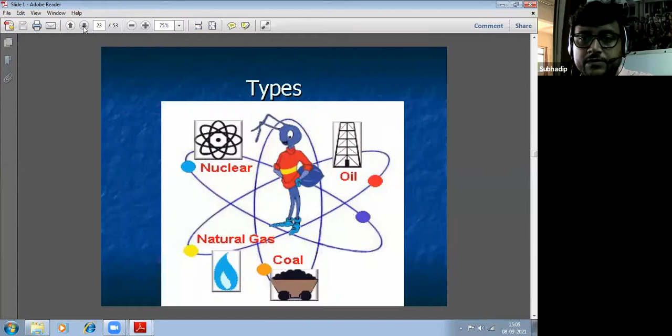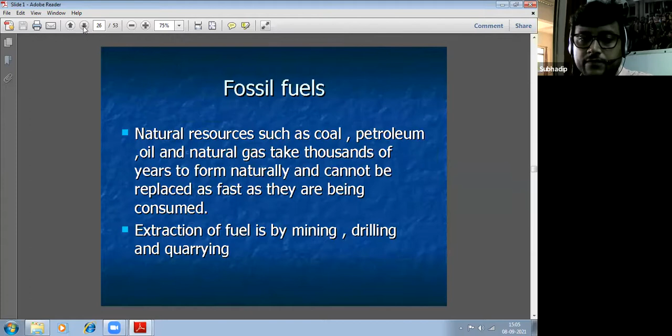So on the last day, regarding renewable and non-conventional energy, we discussed non-renewable sources like nuclear power. We discussed the types: nuclear, oil, natural gas, and coal, and gave a brief introduction to fossil fuels like coal, how it is formed and prepared.

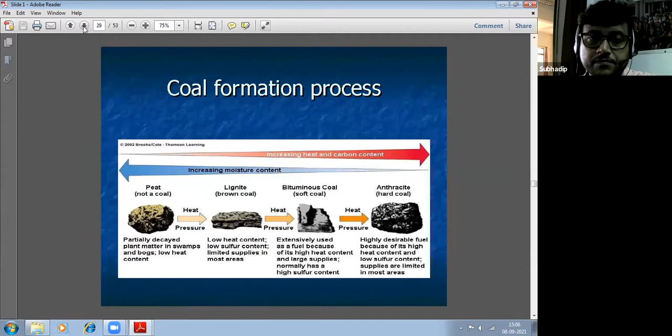Then the coal formation process, and the disadvantages of coal: when coal is burned it produces carbon dioxide that causes global warming. Since coal contains impurities like sulfur and nitrogen, it produces toxic gases during burning which cause acid rain and air pollution. Traces of mercury and radioactive compounds are also released when coal is burned.

It causes severe human health threats like lung disease.

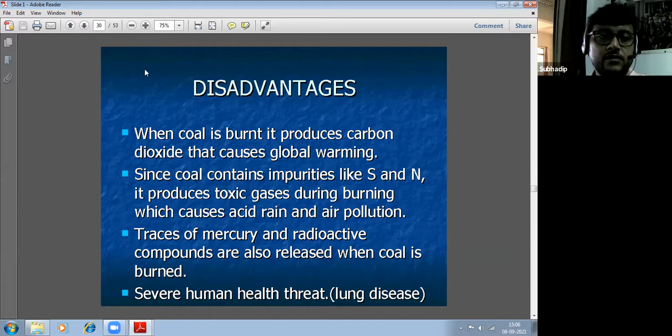Now, oil and natural gas. India has about 0.04% of the world's proven reserve of hydrocarbons. The prognosticated geological resources of hydrocarbon in the country are 21.31 billion tons, of which 61% are offshore and 39% on land.

Crude oil is made of many different components, each with its specific boiling point. Using distillation, we are able to separate these.

Actually, I am having a mouth ulcer, so that's why I'm not able to talk properly.

Crude oil is made of many different compounds, each with its specific boiling point. Using distillation, we are able to separate out these compounds and turn them into commercial products ranging from gases to asphalt.

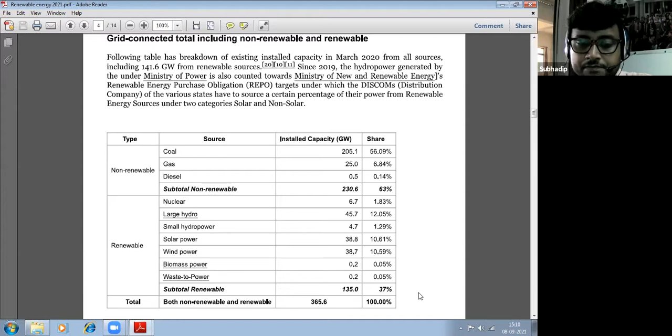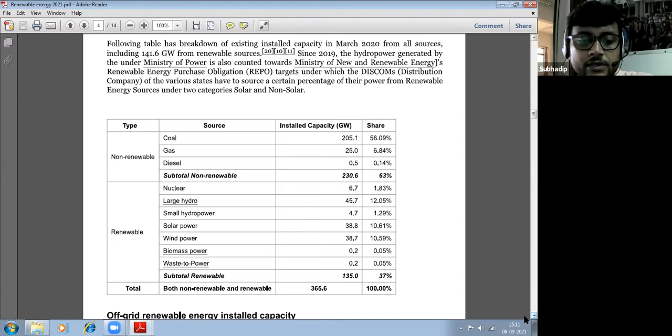So from both non-renewable and renewable, we have totally 365.6 gigawatt installed capacity.

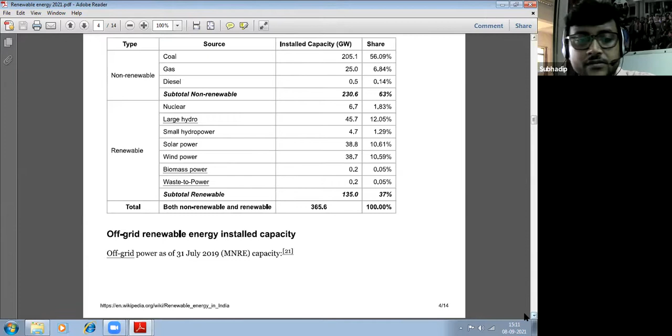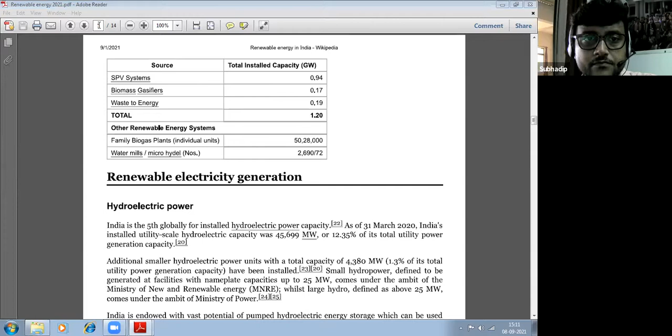Now another thing: off-grid renewable energy installed capacity as of 31st July 2019. This shows the source and total installed capacity. SPV systems have 0.94 gigawatt, biomass gasifier has 0.17 gigawatt, waste to energy is 0.19 gigawatt, and the total is 1.20 gigawatt.

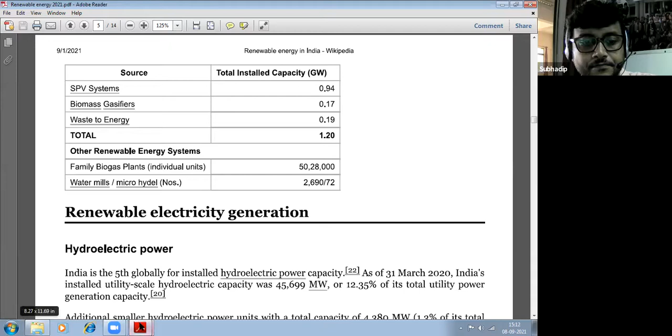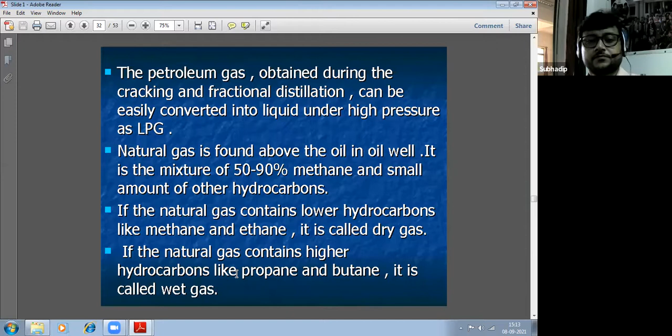Next, petroleum. Petroleum or crude oil is a naturally occurring flammable liquid consisting of a complex mixture of hydrocarbons with small amounts of sulfur, oxygen, nitrogen compounds of various molecular weights and other organic compounds, found in geological formations beneath the Earth's surface.

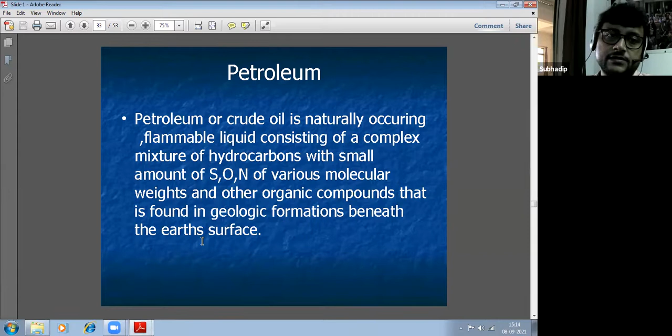Now, how are the oil and gas made? Now you see, this is the ocean. Okay, so 300 to 400 million years ago, these oils were made from these animals. Okay, so these tiny sea plants and animals died. The tiny sea plants and animals died and were buried on the ocean floor.

Over time they were covered by layers of silt and sand, okay, and about 50 to 100 million years ago, okay, the remains were buried deeper and deeper. The enormous heat and pressure turned them into oil and gas. Okay, so from these sea plants and animals, we are getting the oil and gas.

And you see, this is like an ONGC station. Okay, and this is the silt and rock, and this is the deposit of oil and gas. Okay, so today we drill down through layers of sand, silt, and rock to reach the rock formations that contain oil and gas deposits. Okay.

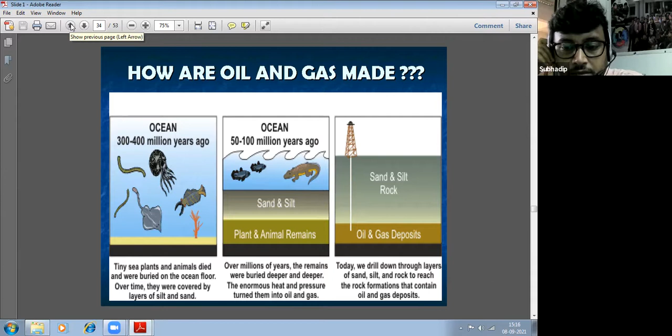Now this is the typical oil refinery process. Okay, typical oil refinery process, and you see the crude oil is heated from the furnace. Okay, the crude oil is here. So whatever the oils, we are drilling down from the particular sand and silt. Okay, through the layers of sand, silt and rock, we are finding the oil and gas deposits.

And see, when we heat the crude oil, okay, when we heat the crude oil, we are getting the diesel oil, then we are getting the heating oil, we are getting the aviation fuel, then we are getting the gasoline, and then we are getting the gases. So there are different segments for the different stages.

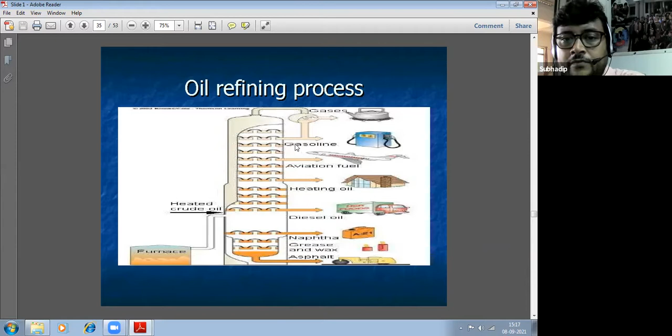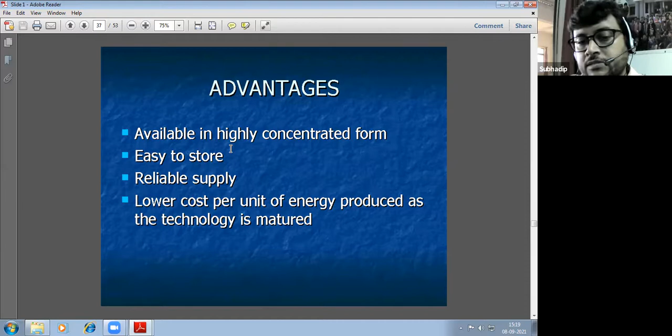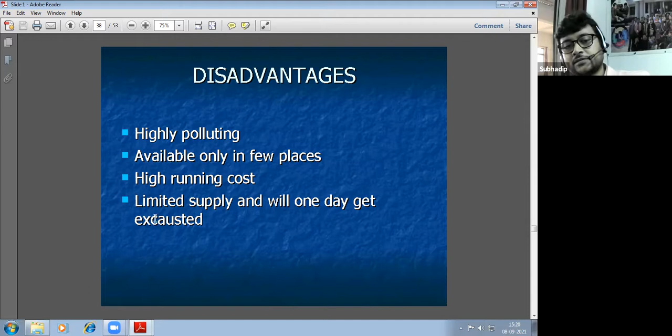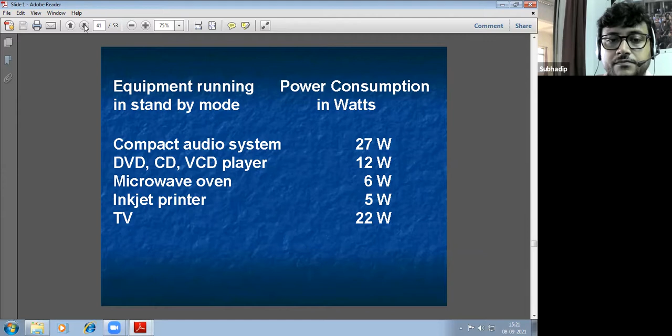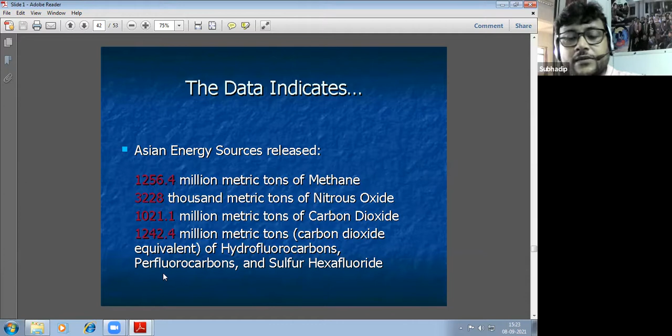Now, why to conserve? Conserve is basically in terms of energy conservation. There are some differences between energy conservation and conversion of energy. So why to conserve? We have limited fuel available on earth, and our demand for energy is increasing day by day.

Because day by day population increases, the number of households automatically increases. Then the demands of jobs, working principles and working networks increase. So it is possible that someday most of the fuel will be exhausted and we'll have to switch over to alternate energy.

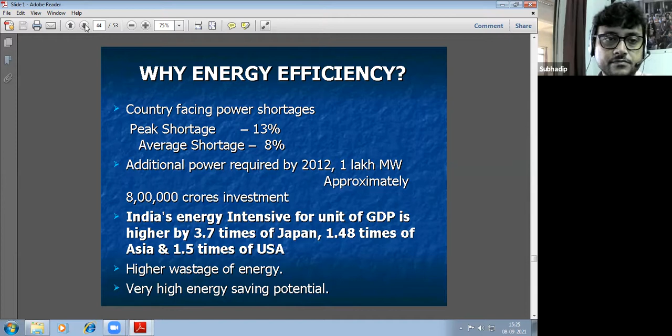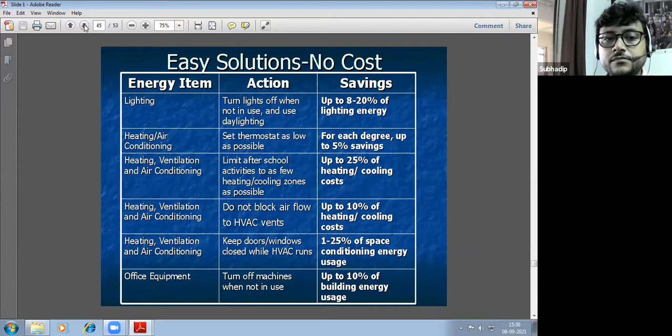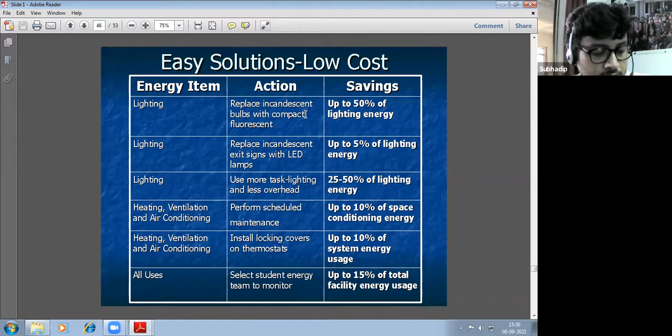Now for lighting again, if you replace the incandescent bulbs with compact fluorescents, incandescent lamps with compact fluorescent. Another is nowadays what we are considering the LEDs. Okay, so if you can also replace the compact fluorescent lamp with LEDs also, in that case you can save another 5% of the energy.

Okay, so if you replace an incandescent lamp with a compact fluorescent lamp, in that case you can save 50% of the energy. Additionally, if you implement the LED by replacing the compact fluorescent lamp, in that case you can save another 5% to 10% of energy. Okay.

So use more task lighting and less overhead. So less overhead means when there is no requirement of direct illumination, bright illumination, there is no need to put the full amount of lights. Okay, so in that case you can save 25 to 50% of the lighting energy. Okay.

Now heating, ventilation and air conditioning. In this case, if you perform scheduled maintenance. Scheduled maintenance means every year there will be a servicing. So if you go for the servicing properly, in that case you can manage up to 10% of the energy. Okay, up to 10% of the energy you can manage. Okay.

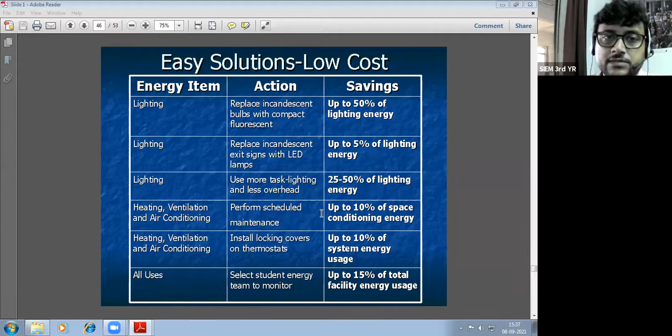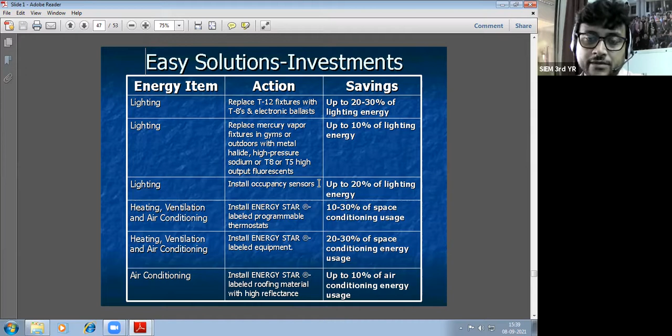Now in India, not only in India, in the whole world, we are not capable to generate or install power on a large scale. Okay, so in that case we also have to go in a certain way, so that by replacing some kinds of lamps you can save some energy. Okay.

Then install occupancy sensors. By installing occupancy sensors, you can save 20% of the lighting energy. Install Energy Star labeled programmable thermostats. You have already seen that on some refrigerators and air conditioners the star marking is there. So when you go to the market, you see that it is a 4-star machine, it is a 5-star machine.

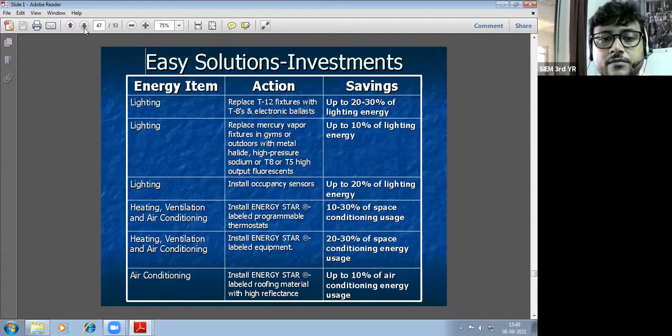So if you purchase a 5-star machine, then automatically that particular machine consumes less energy. Okay, so this is all about Energy Star. Energy Star products meet strict energy efficiency standards set by the US EPA and US Department of Energy. Okay, in 2005, the US saved enough energy to avoid greenhouse gas emissions equivalent to those from 23 million cars.

Please come after 15 minutes.

Cars, okay. Now it saved $12 billion on utility bills and helped avoid 28,000 megawatts of peak power.